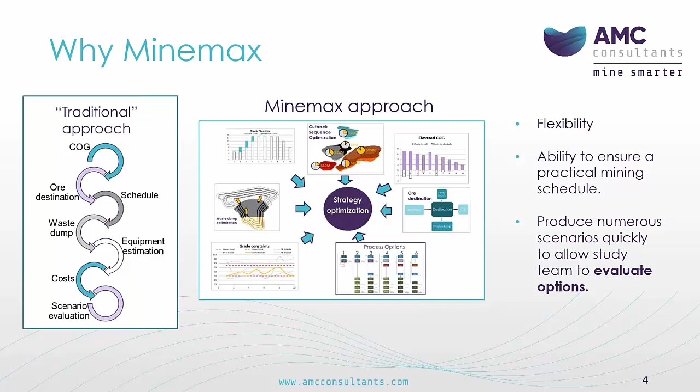When do we use it? Well, the majority of our consulting is at the early project life. At these early stages is when we're really wanting to define the key parameters for a project. Often people can make the mistake of trying to do things right rather than doing the right things. Sorry about that little buzz phrase, but I think that's really the benefit of Minemax, because we can run these scenarios very quickly, and it's a great tool for early stage project planning.

We do also use it in the operational stage. We've been brought in to redirect strategy in a number of underperforming assets in the past, and I think it creates practical solutions through the application of all the different constraints that you can use, such as plant size constraints, fleet sizes, mill blends, advanced waste dump modelling, and the like. We've also tested the strategic schedules we've done in a resource-based scheduler to see if they're actually realistic and achievable, and so far we haven't come across one that we haven't been able to replicate, which is a good sign.

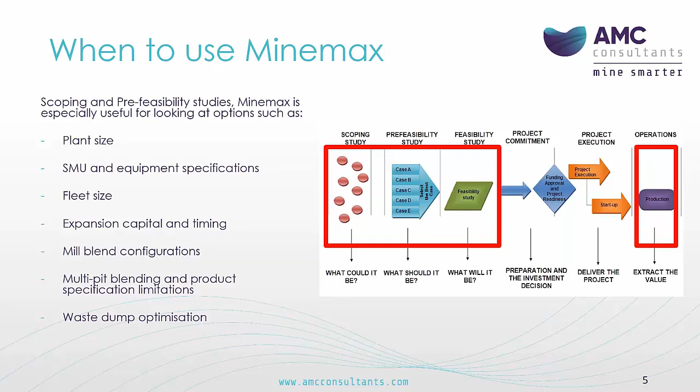So on the case study, I know most here are probably from a coal or similar background. However, the majority of our project work so far has been in either hard rock metalliferous or mineral sands operations. So those familiar with the mineral sands mining process may see some similarities and potential applications of the findings of this study to, say, a coal strip mining operation. So I'll be presenting a case study around a mineral sands operation that we did some work for.

I've tried to beige it out a bit because some of the information was sensitive as they are a client of ours. So I think it's probably actually good that the previous three talks were looking more around the setups and how you actually use Minemax. This is probably going to be more focused on the outcomes that we found when we did the Minemax scheduling.

So the goal, we were engaged to develop a practical mine sequence that maximised the project value. However, there are a number of constraints to consider, such as relocation of gazetted roads, looking at the effect of variable mining and processing rates, as well as a number of significant ESG considerations around land access and noise constraints and rehabilitation to final landform. And also we incorporated a backfill schedule into this because that was a key part of the project.

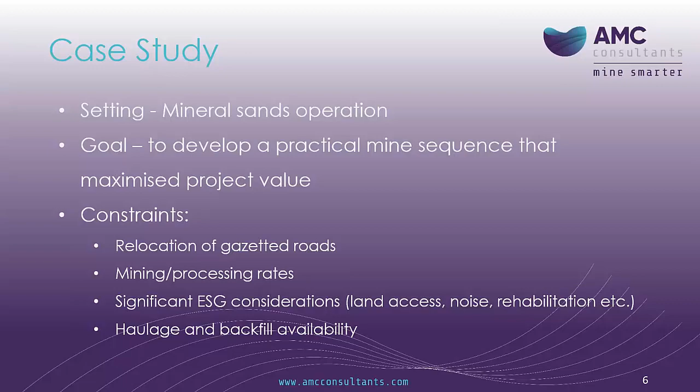So the mining concept, pretty straightforward. The topsoil is cleared, removed and stockpiled. The overburden waste is mined using conventional truck shovel with excavators and trucks, and then a front-end loader coupled with a dozer feeds the ore to the mining unit plant.

Where it's mixed with water to create a slurry, which is then pumped to the wet concentrator plant. The fine tails created from the wet concentrator plant are disposed in a tailing storage facility, and then the coarse sand tails are combined with the overburden waste and backfilled into the voids.

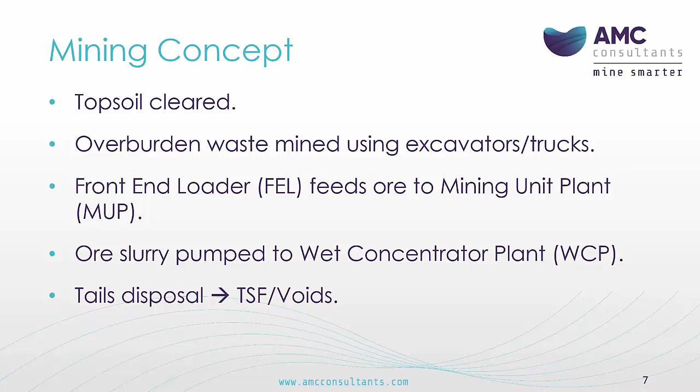So I've just got a little image. Oh, hang on. Is this? Oh, sorry, that's the next one.

Sorry. So on consultation with the client, the design parameters are agreed upon to maximise the productivity based on the ore body geometry. So just from this little schematic here, you can sort of see the process. We have an excavator, or mining's progressing from strip 1 down to strip 6. Actually, that cursor's not working. But, so strip 1 down to strip 6.

We've got an excavator here mining, loading into trucks, which is short hauling to the nearest available dump void. Behind that is the front end loader mining the ore and feeding it to the MUP where it's pumped to the wet concentrator plant.

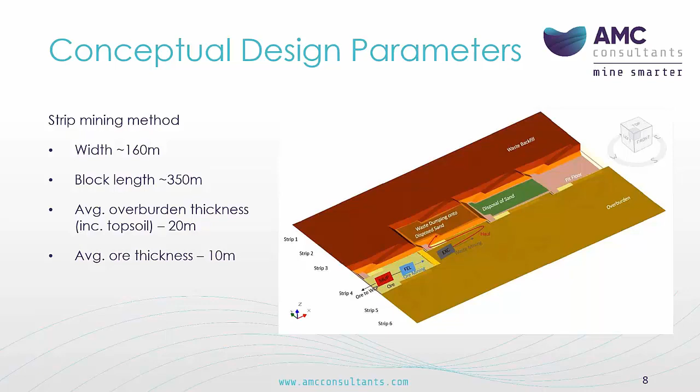Oops, there we go. So the first step was the pit optimisation. So we did a conventional Lerchs-Grossmann optimisation, which created some nested pit shells corresponding to a decreasing value per total tonne. This was then coded into our resource model and imported into Minemax Scheduler, and we ran a scheduler with the sequence defined by the optimised pit shells.

So this is a relatively unconstrained schedule at first, and as you can imagine, the shells didn't define a natural strip mine, but it was really used to give us an indicative theoretical limit for the project value that we can then use for a comparative analysis going forward.

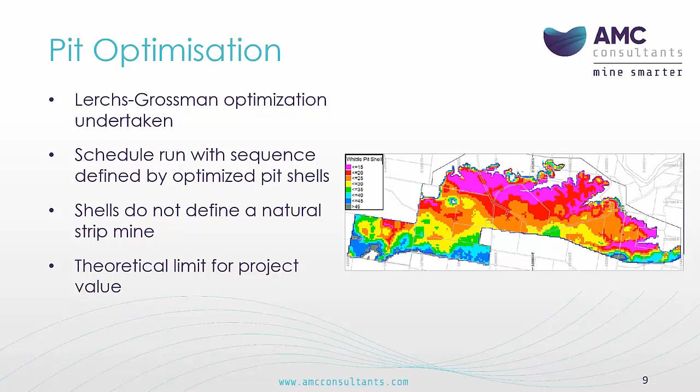We then overlaid heat maps corresponding to value per total tonne and value per ore tonne, and a practical strip mining geometry was applied to generate an indicative sequence for each scenario. The reason for this was we really wanted to test the sensitivity on strip ratio. So if we look at the top one here, this is the value per total tonne, which is indicating we really want to take this material and then move down through here. Whereas this one actually quite likes this area here, and I'll go into the reasons for that later on.

So the reason why we assess these and why it relates to the strip ratio is because our primary constraint was around the wet concentrator plant throughput. So that was our real target rather than the material movement rate. So on assessing them, if there were massive fluctuations in one and a smoother profile in the other, then maybe we would choose one or the other.

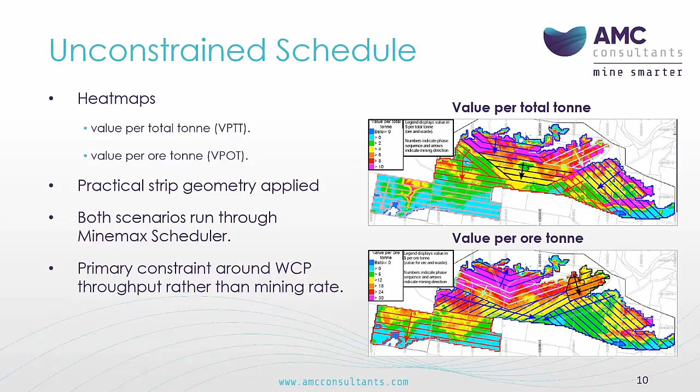And so what we found was that the value per ore tonne scenario compared most favourably to the LG shell scenario. It was only a slight decrease, 0.9% discounted cash flow versus 3.5%. There was a variable strip ratio in both scenarios, so there was no real benefit in either from the material movement perspective. And so we went forth developing our base case based around maximising the value per ore tonne.

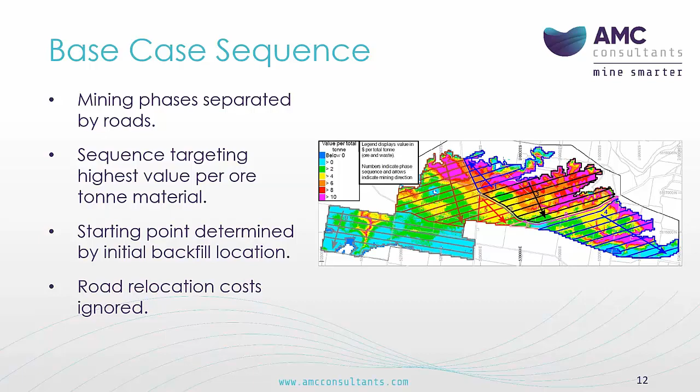At this point, this scenario had no consideration around the road relocation costs, as it was our base case scenario that was relatively unconstrained. We then started applying some of these constraints. So we had some road diversion costs, which we estimated, and we put forth a number of scenarios that had different diversion schedules. So whether we divert the roads early, later on or whatnot.

So we set these costs up in Minemax as a capital expenditure item to release the blocks adjacent to the roads for mining. And what we found was that the highest value schedule saw the majority of the diversion costs incurred in the first 3 years. And so deferring these costs would have had a detrimental effect on the phase sequencing and thus the project value. When we looked at the costs in comparison to the value, they were orders of magnitude smaller. So they probably didn't have a large impact on the overall project value.

One other thing about the road relocation is that it necessitated a realignment of the phases to the west of this road here. So previously these strips were aligned east-west. We then changed that to north-south. The reason why was to expedite the backfill and subsequently return the roads back to their original alignments as soon as possible based on the community requirements.

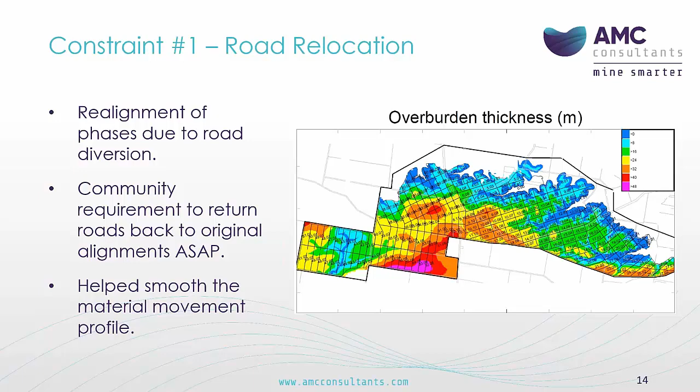This actually helped smooth the material movement profile as there was a bit of a hill here with a much thicker overburden, and as we were cutting across it here in the previous schedule, we found that we were becoming waste constrained, whereas cutting sort of down through here, it enabled us to smooth the material movement profile somewhat.

The second constraint, as I mentioned, was around the mining and processing rates. So we set up capital expenditure items around the purchasing of an additional MUP. Scheduler indicated that the optimal sequence was to expand immediately due to the effect of discounting. Often, as Matt mentioned, it'll generally pick the best time in the schedule. Often what you find is that's as soon as possible.

After discussion with the client, however, this was deferred to year 3 based on the availability of the mining equipment. And the start point of the second MUP was determined considering a practical mining sequence and targeting the highest value ore available at that point in time.

What we found, which was interesting, was that the ore mining target was unable to be achieved in some of these earlier periods here. However, as the revenue was linked to the concentrate tonnes, we found that it started targeting the higher value material in order to max out our concentrate tonnes while still not reaching that constraint. So that was an interesting change in tack that we found from the base case schedule.

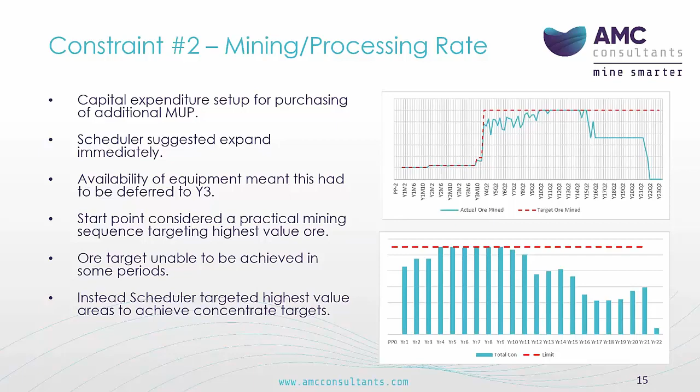Around the mining rate, the overburden mining is directly linked to the processing rate based on the mining sequence that I explained earlier. So we set up capital expenditure to model the purchasing of additional excavators and trucks, and these were then considered in the schedule with the constraints lifting if and when scheduler wanted to purchase an additional fleet.

The net result was a smoothing of the material movement profile as now the material movement was governed by truck numbers. So you can see here, it was an incremental increase rather than previously it was jumping around all over the place.

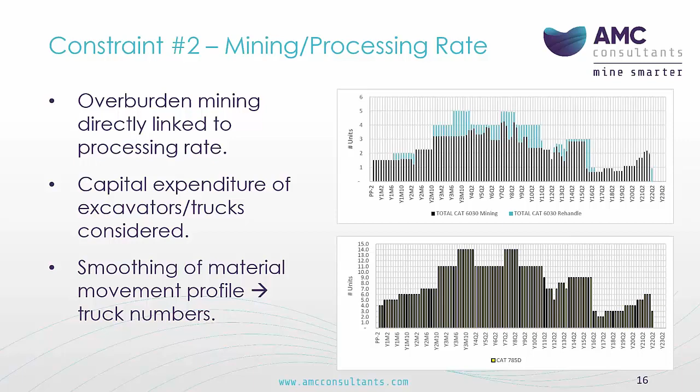The third constraint was around noise and land access. So noise modelling was undertaken to assess the impact of mining with respect to a number of identified receptors adjacent to the mining lease, which you can see on this image here.

Sorry, I just realised I'm pointing on this one and not on that one.

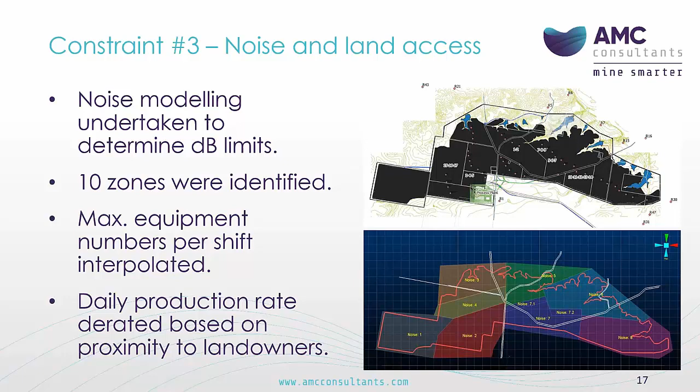But so these are all landowners adjacent to the mining lease here. So we identified 10 zones based on the allowable noise limits that came out of the modelling. And then we estimated from that the maximum equipment numbers per shift that were available and the number of shifts that we could mine in a 24-hour period. And from that we were able to calculate a daily production rate for each zone.

We then set a process up in Minemax Scheduler to reflect the number of hours for an excavator to mine a block, which was again good because that's a time-relevant constraint, so essentially the available hours per period, which was useful for us as we had a schedule that went from quarters into annualised later in the schedule. And then that was able to be applied to model the productivity reduction when mining through each zone.

This normalised the mining areas and allowed scheduler to optimise the excavator efficiency across the life of the project, which we found was a more effective approach than a typical rate constrained or tonne constrained schedule. I guess in a tonnage constraint schedule you would have to set up each region and set up constraints like that, whereas having just one process that we could constrain did it all for us and improved our import time as well.

So just continuing on that, 5 different scenarios were then run, modelling the removal of these limitations through the purchasing of the adjacent land. These scenarios range from a do-nothing approach to acquiring all of the receptors. The previous study work that had been completed by the client hadn't necessarily indicated which receptors they were going to go forth and purchase, so this really allowed us to discretise the zones that had the biggest effect on the project value.

So the capital expenditure of acquiring these receptors was incorporated into Minemax Scheduler and linked to an improvement in productivity. And this process, as I mentioned, informed which receptors should be acquired and those that added no material benefit to the overall project value. It also identified which areas should be accelerated and decelerated based on the preferred mining areas.

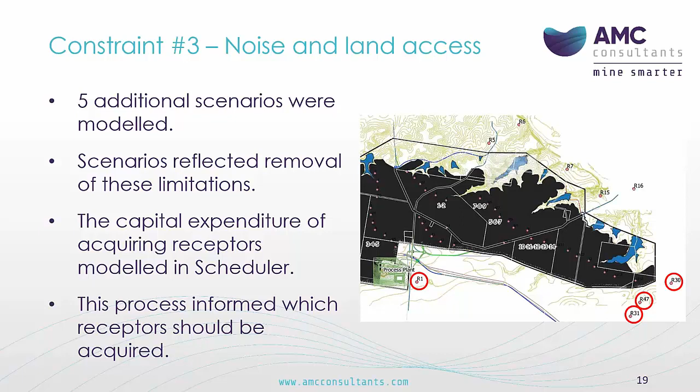And I guess similar applications in coal may be when modelling, say, biodiversity offsets in order to define a mining sequence. And as I mentioned, generally scheduler will want to expand as early as possible due to the effect of discounting. So the good thing about linking the capital to the mining areas is you can model that as you go through the schedule rather than an upfront cost incurred.

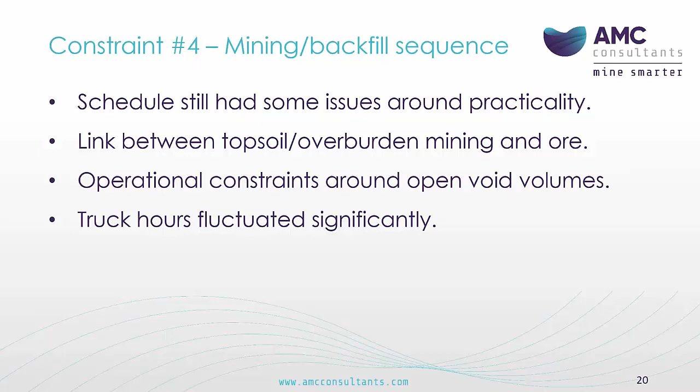Despite the addition of all the previous constraints, the schedule still had some issues around practicality. What we found was often that the topsoil and overburden was stripped too far in advance of the ore mining. Additionally, there were some real operational constraints around the volumes of open void that we had for dewatering, and we needed to address those. So these issues often also meant that there were some large fluctuations in the truck hours when we went through the reporting.

So it's interesting, actually, Matt was talking about flipping the model to a vertical orientation. I've sort of tried to do something similar with this schedule. So the topsoil, overburden and ore components within each strip were set up as dummy pit stages, essentially, so we could link them that way. And then the blocks were set up as dummy benches. So we basically had the bench number decreasing as we go down through the strip. And then we controlled them using VRA constraints, which allowed us to control how far we could progress through a strip in each period.

We also then set up a number of detailed precedences in Excel, which you'll find when you use Minemax regularly becomes your second best friend. And they had maximum and minimum lags set up to them that we could then just copy and paste back in if we wanted to adjust them at all, because I think there was around 500 or so. And this enabled us to produce a schedule which minimised the haul distances as well as factoring in the time to dewater each mining block, as well as considering the deposition of tails within each strip.

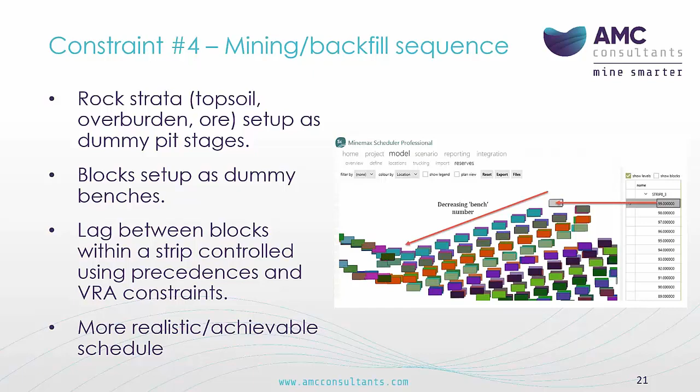The backfill of voids with the overburden was also modelled in Scheduler, as I mentioned previously. So the backfill model was imported into Minemax Scheduler and linked to mining blocks through precedences in order to minimise the haul distances. And the volumes of these blocks were adjusted considering the placement of sand tails that were being produced, and they were adjusted accordingly.

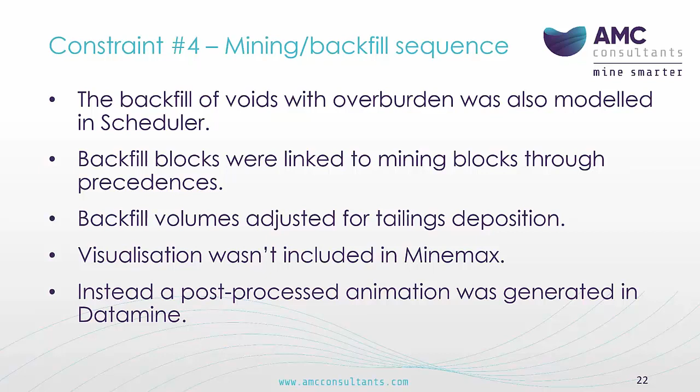There's been a lot of discussion around import and running time. We ran a lot of scenarios. So in order to decrease the import time and the running time, we didn't actually import a visualization for the backfill model. Instead, we post-processed an animation in Datamine with the schedule results coded into the wireframe solids, which I will go through now. This works, yep.

What we found, which you'll see later on in the animation, is there was a road through the southeastern block that had to be in place at all times. So we had to jump the sequence down, take out a block beneath it and backfill as quickly as possible, relocate that road, and then take out the blocks where the road originally was, and then move it back once the backfilling had been completed.

And so the client obviously was quite happy with the schedule in the end, and we did see a material increase in the project value when we compared it back with the PFS. But I think the main benefit was looking at all of these practical constraints which were real in this project, and considering how we could get a mining sequence that ticked all of those boxes, and using Minemax we were able to do that. So it was a good result in the end.